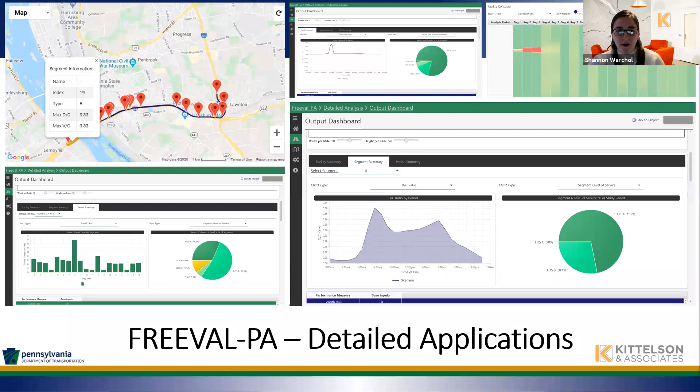In your output section, you can see things such as what percentage of the day or of your segments are at various levels of service. You can see graphical representations of queues, delays, or travel times - many ways to view the output from your analysis, and Bastian will cover that.

I want to take a minute to talk about the policy implications of FREEVAL. As Ed mentioned, this will be rolling out in the first 3 months of 2021 - here we say January 1st, 2021. That may be pushed back slightly, but the implications are the same whenever they do roll out.

For department force maintenance projects, the evaluations will be performed by the district traffic or maintenance staff, and they'll receive approval as needed by the district traffic engineer prior to conducting the field activity. If your district has multiple activities happening that require the same general work zone setup, that analysis can all be done together.

For department construction projects, the evaluation is performed by the design staff, and approval is needed from the district traffic engineer prior to approval of the temporary traffic control plan. For business partner maintenance, construction, or permit projects, the evaluation should be performed by the business partner, and approval is again needed by the district traffic engineer prior to heading into the field for any activity.

The publications this will impact: Pub 23 will require maintenance supervisors and assistant county managers to consider lane and shoulder restrictions during their planning phase for limited access highways. All the pertinent information for proposed work zones will be provided to the district traffic unit for analysis.

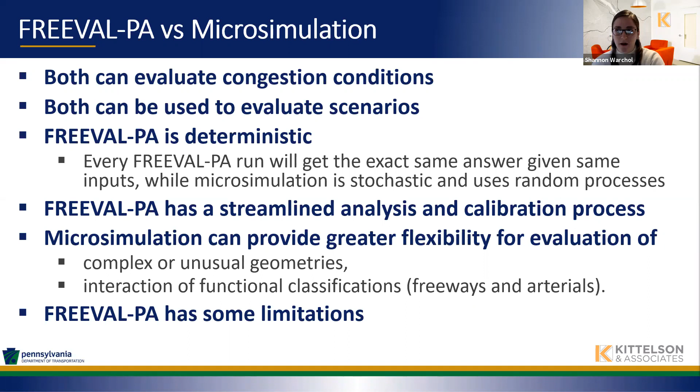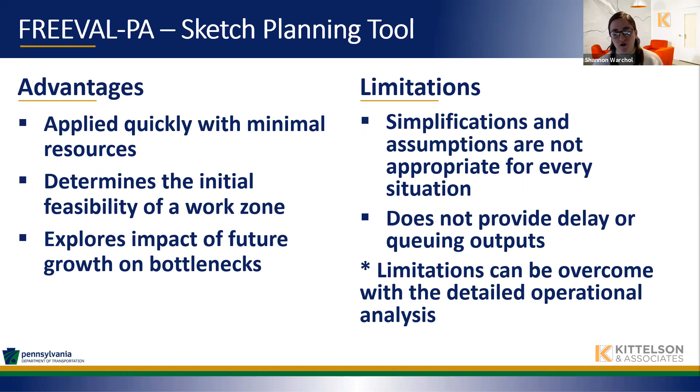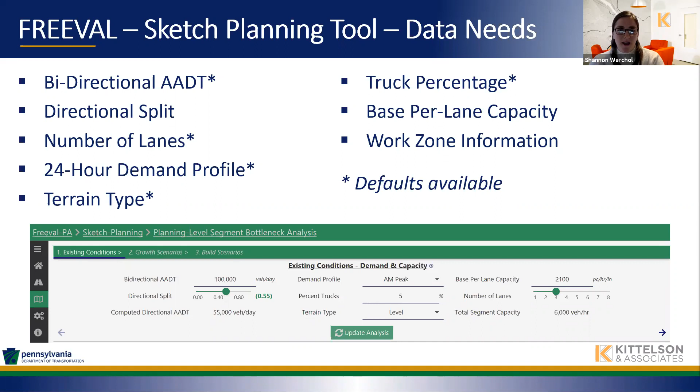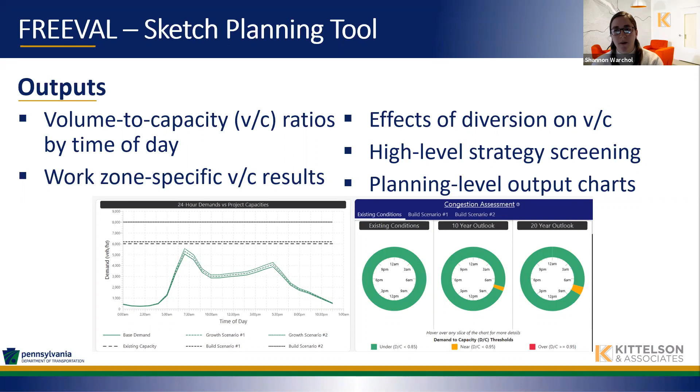Alexandra is going to dig in more on the specifics of inputs and outputs, but here's just a quick overview of the types of inputs. You saw some of those output charts earlier, volume to capacity ratios, work zone specific volume to capacity ratios. Again, it's a high level strategy screening.

On the detailed analysis, the advantages are it balances the detail needed with the output provided, striking a balance between the planning level tools and the microsimulation. It can consider the freeway as a facility with multiple segments, the basic weaving, merging, and diverging segments. It can provide those congestion metrics, and it can be used to explore various mitigation strategies, work zones, future growth.

But the limitation is that it lacks focus on the system effects. It does not look at the arterial interaction, and unusual geometries need calibration.

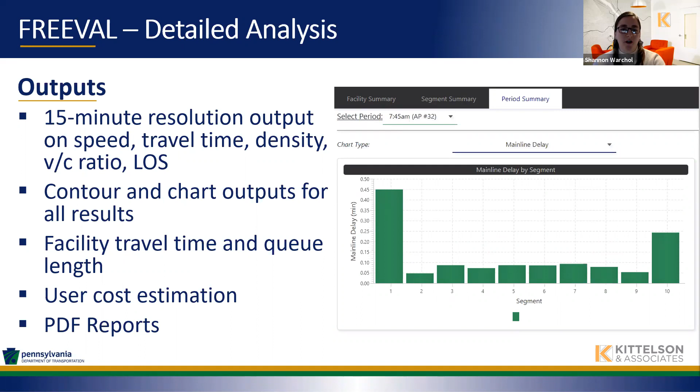Bastian will dive into specific data needs around the detailed analysis, but it's the same inputs as the sketch planning, just at a finer resolution. The outputs are speed, travel time, density, level of service, user cost estimations, and it will create a PDF report for you. So real quick on a limitation here, I'm sitting about a mile away from the Squirrel Hill Tunnel.

Just as an example of maybe what would be more complex in FREEVAL. For those who aren't familiar with the area, we have a stop-controlled on-ramp that leads you to merge into a lane drop. On that exit ramp, you actually have a weaving scenario, and downstream of all this, you have the Squirrel Hill Tunnel, which has congestion issues fairly frequently. A situation like this has a lot of unique features where queuing can occur.

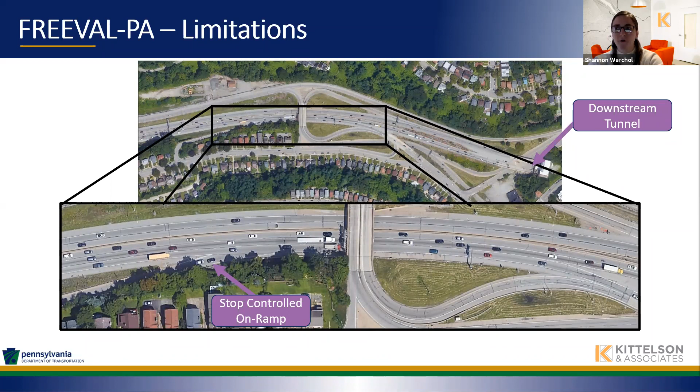You can analyze this situation in FREEVAL. You would need to be very conscious about the calibration, and you would need some field data to help you calibrate that. There are many situations that can be analyzed in FREEVAL-PA, but again, and Bastian will really hammer on this, calibration is very important for these unique geometries.

Of note, FREEVAL is based on the HCM methodology. So if there's something that is not addressed in the HCM methodology, it's difficult to address in FREEVAL. For example, the present HCM methodology does not have a method for evaluating these complex weaving segments with multiple on-ramps and off-ramps, similar to the visual shown here.

You would need to be careful in FREEVAL about how you would break these into subsegments, and again you would need some ability to have some field calibration data. The online modules really dive into this calibration process.

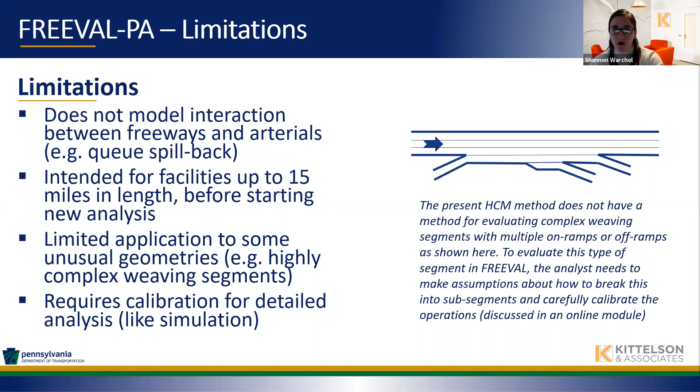FREEVAL can be used for a number of different applications. Right now for Pennsylvania, I think the focus is going to be most heavily on work zones. So focusing on work zones, you can look at the various work zone scenarios, like if you're creating your contracting requirements of what times a business partner can close lanes.

FREEVAL is great for that analysis. Looking at the minimum number of lanes the business partner must maintain is also great in FREEVAL. If you're trying to figure out a diversion target, how many vehicles should we try to divert off the facility, FREEVAL will give you that information, and again, the lane reservation system.

Bastian and Alexandra are going to focus on a number of scenarios, hands-on examples, but I want to give a quick view here of US 222 north of Lancaster. So FREEVAL was not used to inform the scenarios for this project, but it could be. This is an example of where you could potentially use FREEVAL.

So US 222 north of Lancaster, they were looking to complete some work on two bridges here, one at Glenwood Drive and one at Pleasant Valley Road. And so the question becomes, how should you set up your work zone staging? Or how should you stage your work zone?

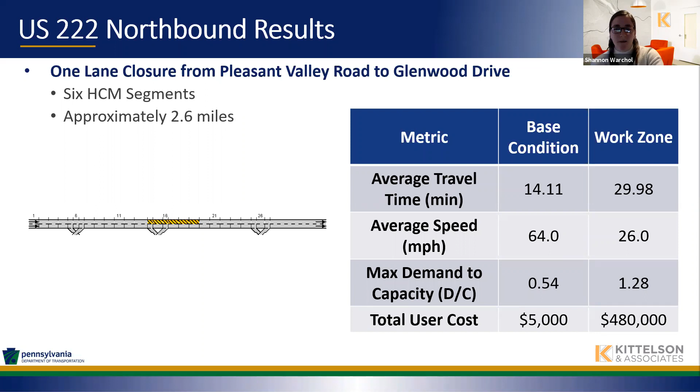In FREEVAL, here is an example where there are 6 segments that have been closed, one lane closure for the northbound route. And we can see some quantitative results here. FREEVAL also provides visual results. So we can see on the left a normal condition.

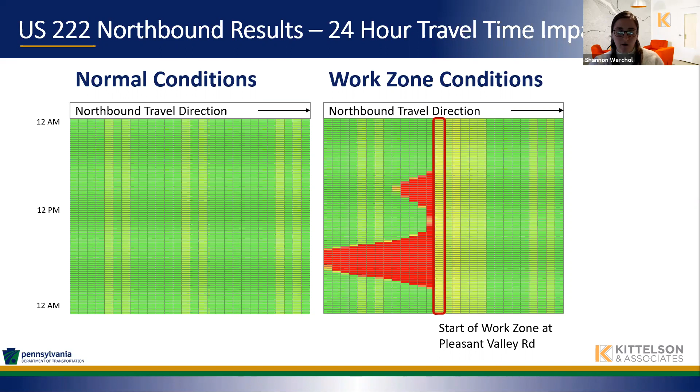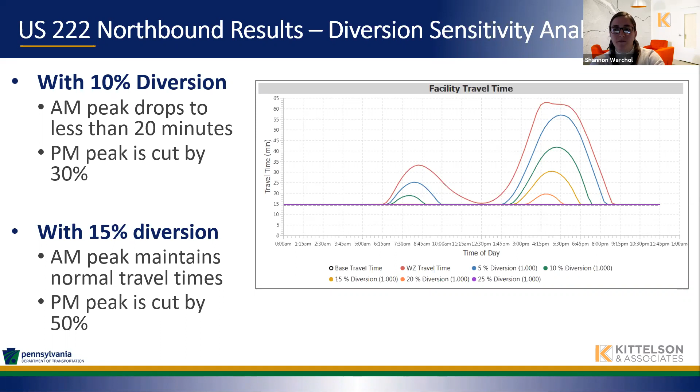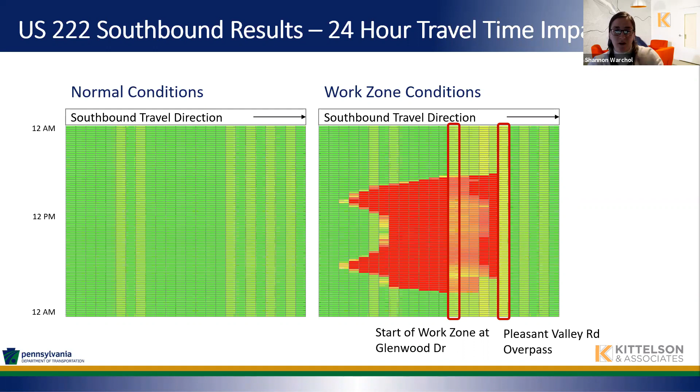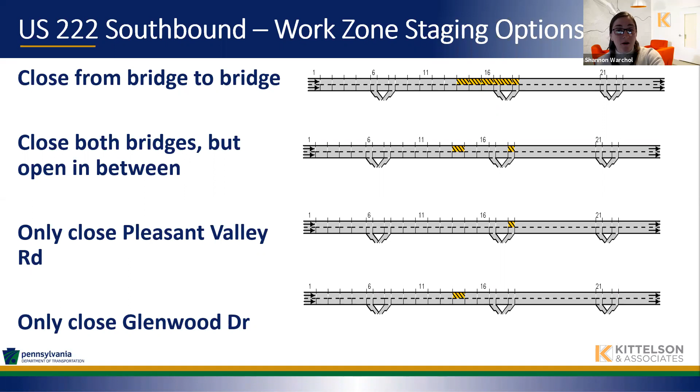In a scenario like this, FREEVAL is a great tool to help you look at what are some alternatives, right? If I close the one lane, the full length of the road from Pleasant Valley all the way to Glenwood, we're going to have some serious issues in the southbound. I'm going to get some calls, some complaints. What could we do instead? Here are 4 different work zone staging options, right? So close from bridge to bridge, like we just showed, close both bridges but open in between, or do your bridge work one at a time. And FREEVAL can show you the various impacts there.

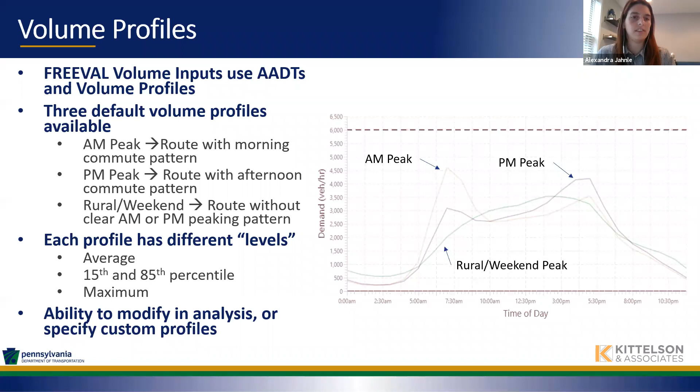Now I'm going to move into discussing some of the planning applications of the tool. And after that, I will dive into some hands-on exercises to demonstrate the tool. The FREEVAL-PA sketch planning method is intended to provide a high-level assessment of volume to capacity ratios by time of day. It does not provide delay or queuing performance measures and is not sensitive to segment geometries. But there are a variety of applications for this planning method, and it's really based on this quick turnaround assessment of volume to capacity patterns.

The method only takes a couple of minutes to complete. It can be used as a pre-screening effort prior to moving into a more detailed FREEVAL analysis, or it can be used as a standalone analysis. It can provide a high-level assessment of work zone impacts, such as including lane or shoulder closures. And the planning method can also allow for conducting some sensitivity analyses. In the context of PennDOT's lane reservation system, the planning method also includes a corridor assessment tool.

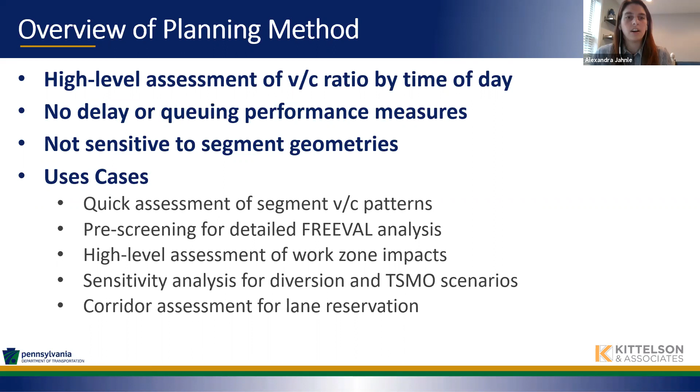To understand the planning method and how the volume to capacity ratio approach is applied, it's important to discuss the definition of capacity. The HCM defines capacity as the maximum sustainable flow rate to pass through a freeway segment. And when capacity is field measured, it's typically expressed in units of vehicles per hour. In the context of the Highway Capacity Manual, capacity is expressed in units of passenger cars per hour.

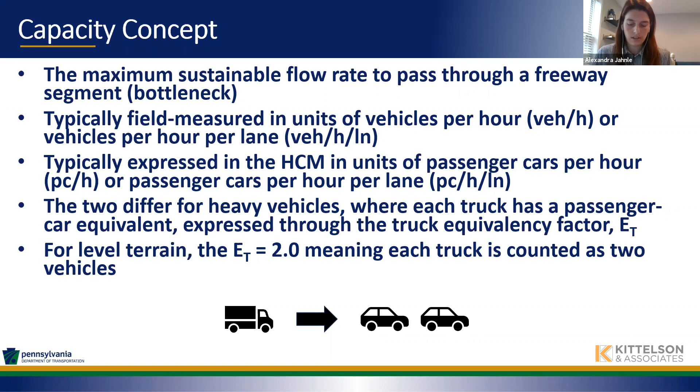These two units differ for heavy vehicles, and when you're looking at the Highway Capacity Manual definition, each truck is counted as a passenger car equivalent, which could vary as a function of grade or terrain type. So for example, the truck equivalency factor for level terrain is 2, which means each truck is counted as 2 vehicles. And for steeper grades, the truck equivalency is higher.

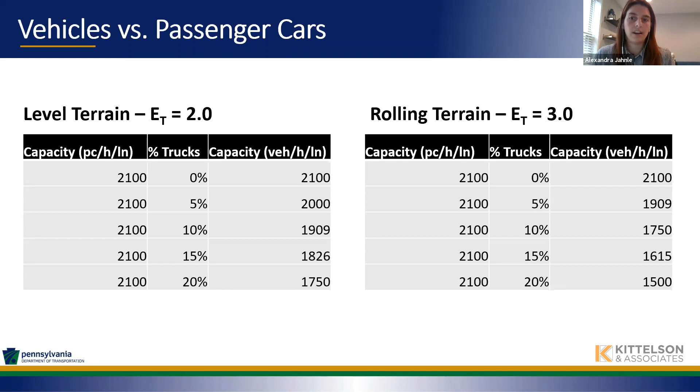All of the calculations in the Highway Capacity Manual and then in FREEVAL-PA are completed in units of passenger cars. So it's important to understand this concept and the conversion if there's any field measured capacities from video or sensor data used to calibrate the tool. There's many more details and tables that document this in the Highway Capacity Manual.

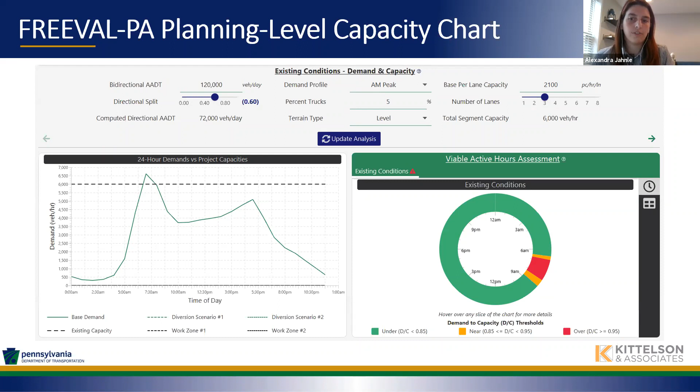On the left, you can see a 24-hour demand versus project capacity ratio. The outputs are provided in a radial and a tabular form on the right, and you can dive into more of the details. These outputs allow for a high-level screening before conducting a more detailed analysis.

So there's going to be 3 exercises to demonstrate how the tool can work. For the first exercise, we're going to look at a project-independent single segment planning analysis. And I'm going to talk through the input data that's shown here, and then answer the following questions as we navigate the interface. So I'm going to now open up the program.

And so as you see on my screen here, there is the FREEVAL-PA desktop shortcut. And then this box pops up when you first click on that program. You can select Open FREEVAL-PA. So for the first exercise, we're looking at a new sketch planning bottleneck analysis.

So when we're looking at the screen, in the center of the tool, you can see there's a create analysis from PennDOT segmentation database. This is how you would access the database that I described earlier. You can also create a new analysis from a blank facility template. This is where you would select and access that part of the tool. You can open an existing analysis as well.

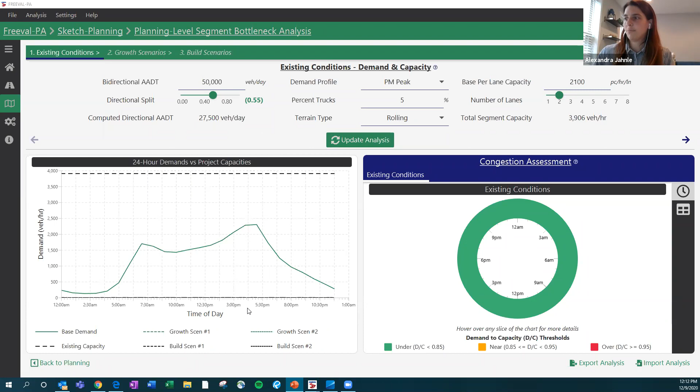So now we're going to look at some questions. So first question is, what is the maximum volume to capacity ratio for the present year scenario? So for the existing conditions, we can see that the maximum volume to capacity ratio is occurring in the PM peak time period. We can further analyze this by looking at the tabular form by clicking on the button to the right. If we scroll down to the PM peak time periods, we can see that around 5 o'clock, there is a 0.59 base capacity.

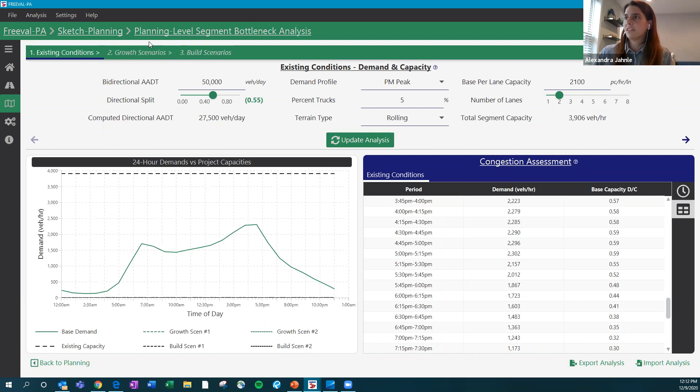And then the next question that we want to look at is, during which times would an 8% growth scenario be near or over capacity? To further look into this, we can access the growth scenario step 2 by clicking up here on the top left of the screen, or we can just select this next arrow on the far right of the window.

To apply a growth scenario, we check this box and we can type the name of the growth scenario. Growth scenario number 1. Then we can apply a growth level. So I'm going to apply a custom growth level of 8%, 1.08, and then you select Update Analysis.

Once you select that, you can see a new demand profile appears on this dotted line, and that's representing the growth scenario number 1. You can also see that another column is applied on this tabular form, and you can see that for that same time period, the volume to capacity ratio has increased. You can also go back and forth between the radial and the tabular form.

And what is the maximum V over C ratio in this scenario? Okay, yep, we looked at that and it's 0.64. Let's just apply one more growth scenario and just to see what the results are with a high 20% growth scenario. If I update the analysis, you can see how that increases.

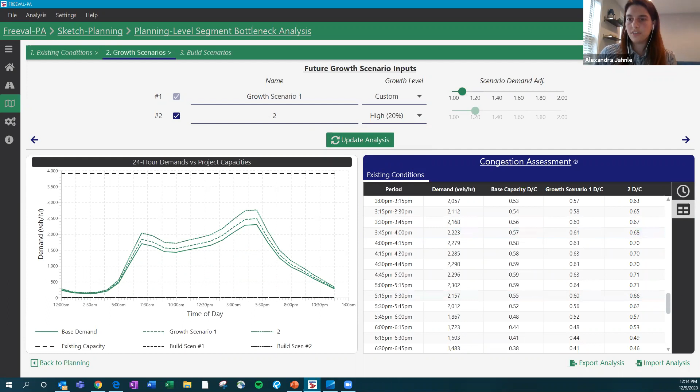So for this, I'm now going to just move into the second exercise. This exercise is going to be a project-based segment level analysis, and we're going to open an existing file to start this exercise. And we'll dive into one segment within the existing facility.

So let me navigate back to the program. I'm going to open up a new file. And so we can navigate to the center of the tool and select Open, and then navigate to a file. Once you select that file, you can see that the facility will populate on the upper left-hand corner of the screen. You can zoom in and out by holding Control and zooming with your mouse.

You can select a facility, a segment of the facility, and see information about the segment. You can also scroll on the bottom of the screen here and select a segment this way. A third way that you can select a segment is by using this drop-down menu and scrolling down to a segment you're interested in analyzing.

For this part of the presentation, we're going to look at the planning level performance of segment 20, and we're going to use the work zone segment staging part of the module. Once you select that, we can enter the information in the exercise. So we'll first enter 50,000 AADT, a directional split of 0.55. The demand profile is in the AM peak period, and the rest of the inputs are default from the file.

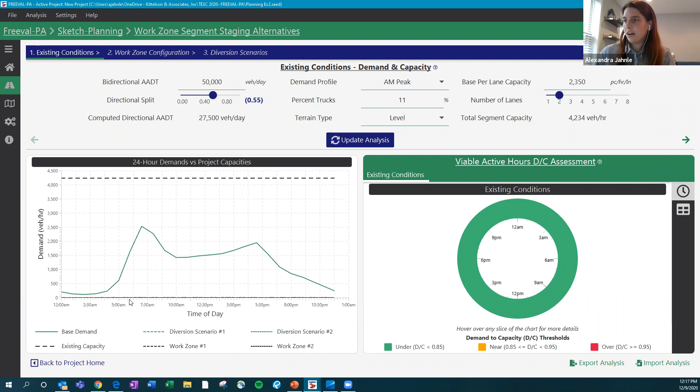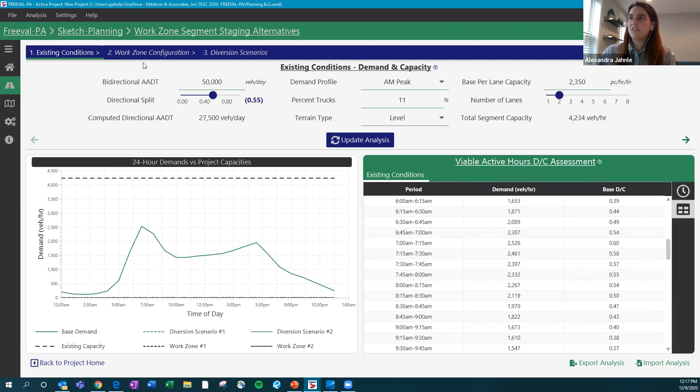And we can see here that the highest demand is occurring during the AM peak periods, about 7 a.m. We can further investigate this by looking at the AM peak period and see that it's close to 0.60. The next question is, what is the estimated max volume to capacity ratio with a shoulder closure? We can move into the work zone configuration step 2 to look into this.

I'm going to apply the first work zone, and it will be a shoulder closure. So you can name that feature and then select a shoulder closure. You can also adjust the work zone capacity using this bar. Then we're going to select update analysis.

So you can see that there's a second dashed line that appears, and this represents how the capacity has changed due to that work zone configuration. You can also see another column that's applied that represents that shoulder closure in the tabular form. The next part that I'm going to show is adding another work zone configuration. This one will be a lane closure.

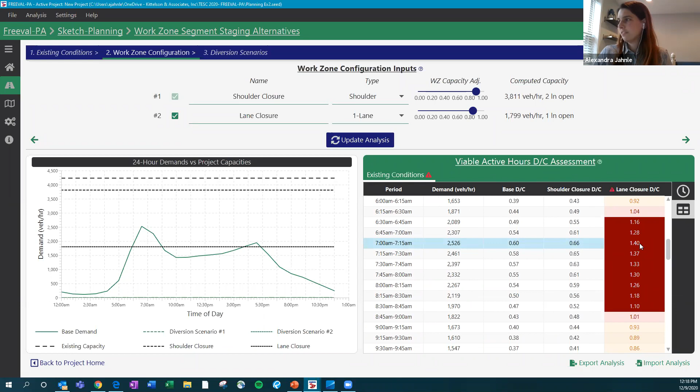So when we apply this lane closure, we're going to update the analysis. And as you can see, the computed capacity for the facility has dropped below the demand curve. We can also see this in a tabular form that now that same time period is at 1.40, which is far over capacity. You can also illustrate this in the radial form, and you can see that in the red areas, it's showing the V over C ratios that are over capacity. The yellow is where they are near capacity, between 0.85 and 0.95.

I'm going to quickly show the diversion tool. If we click that button, we can show that, let's say for diversion scenario 1, we apply a 20% diversion on this segment. We click update analysis. We can see a new profile appear. This is the diversion scenario number 1.

You can also toggle between the existing conditions and the diversion scenario and see that for the lane closure, in the AM or in the PM peak hour, it is not over capacity, it's near capacity. You can also visualize this. If I scroll down to the PM peak hour, you can visualize the difference between the diversion scenario and the existing conditions in a more detailed form.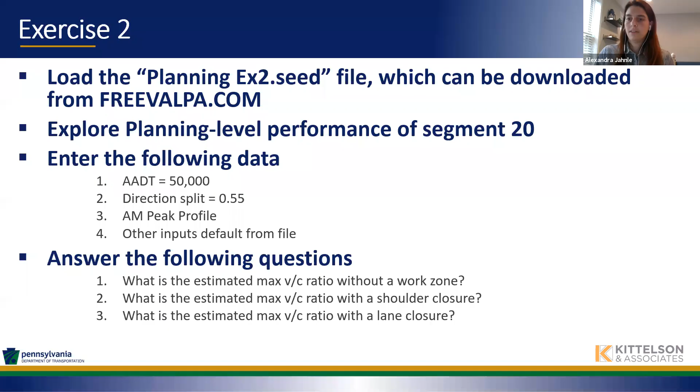With that, I'm going to now move into the second exercise. And for this exercise, we will also explore an existing file and then look at a corridor level planning analysis. And we're going to enter some information about a one-lane closure and then answer a couple of questions about how we can navigate the tool and look at different features of this performance section.

So now let me get back to the program. I'm going to reopen that file. So I'm going to click home and we can proceed and then navigate, and I'll open the file this time through File, Open Project. And I will select that file again. Okay, so for this part of the tool, you can see that we're on the same screen that we just had. In the top left corner, there is the facility. And instead of selecting a specific segment, we're now going to move to the work zone corridor planning module. So we can select go on the screen here.

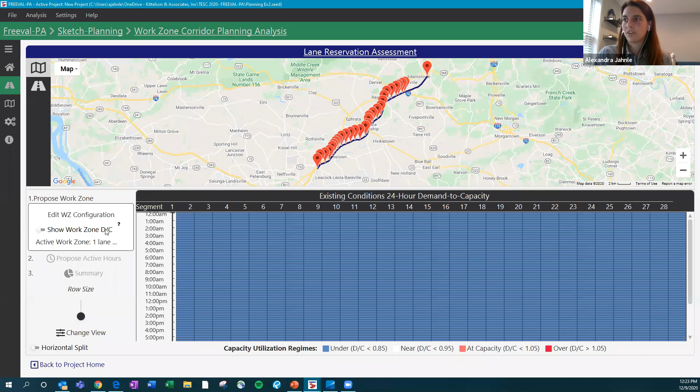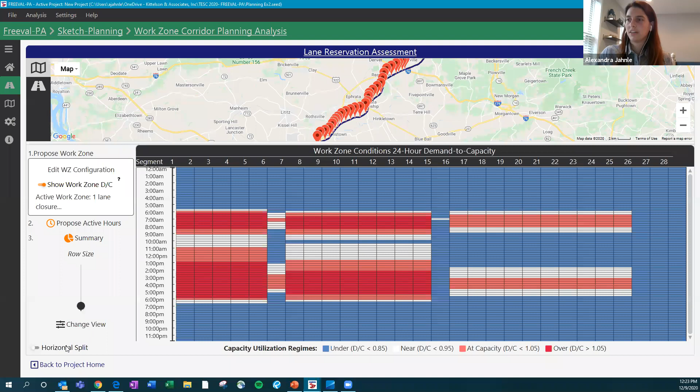Once you click save, you also have to click this button next to show work zone D/C, and you can see the work zone applied. You can also change the view of the screen by clicking horizontal split. For the purpose of this exercise, I think it's easier to visualize. So now that we have this shown, we're going to look at one of these questions. What segments along the facility result in potential capacity constraints for a lane closure?

As you can see here, many of these segments have capacity constraints. The dark red is a volume to capacity ratio over 1.05. The pink color is when it's at capacity, white is near capacity, slightly under 0.95, and blue is under capacity.

The next question is, what is the estimated max volume to capacity ratio for a lane closure in segments 8 through 12? If we want to look at that, we can hover over and see that in the AM peak hour, segments 8 through 12 are around 1.15. In the PM peak hour, they're closer to 1.2 or 1.23. You can see additional information as well.

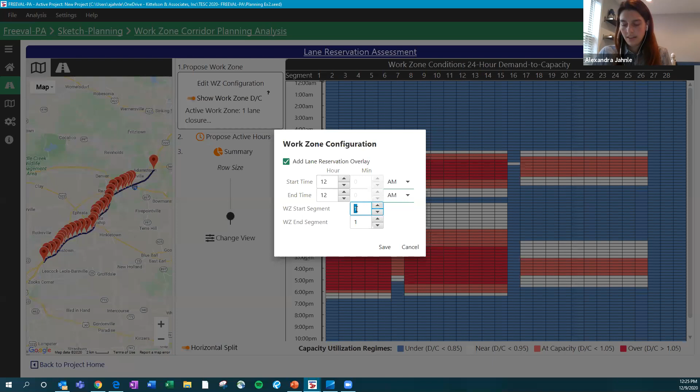Next, what percentage of time periods would be at or over capacity if a 24-hour lane closure was put in place in segments 8 through 12? To see this, we're going to use step 2, propose active hours. If we add a lane reservation overlay, we can maintain the 24-hour time period and then update this to be segments 8 through 12.

Once that's applied, you can click step 3, summary, and you can view a summary of those periods. To answer the question, there are 21% or 100 periods over capacity for those segments in the 24-hour time period. You can also see a summary of this information on the bottom left-hand part of this screen.

The next part of this tool I wanted to share was when we're looking at this next question: what are the allowable lane closure hours in segments 8 through 12 without exceeding capacity?

So there's another part of this tool where you can select change view, and this is the reference start time for where the time periods on the left side of the screen start.

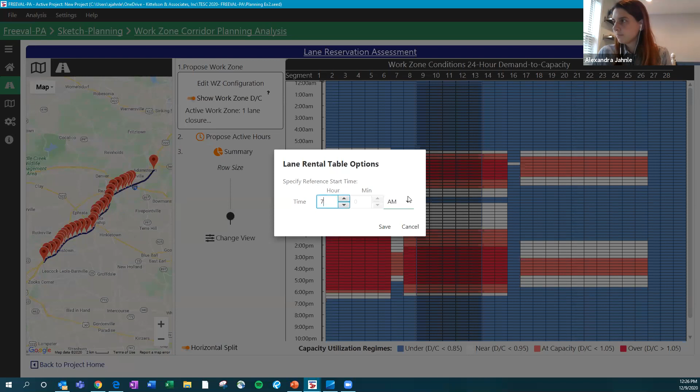If we update that to 7 o'clock p.m., we can see how the time shifted on the left-hand side, and we can visualize that if we close the lane between 7 p.m. and before 6 a.m., that is the time period where we would not exceed capacity with this lane closure, whereas during most of the day, we would have impacts.

So with this, I will now hand it back over to Ed to move on to the next presenter.

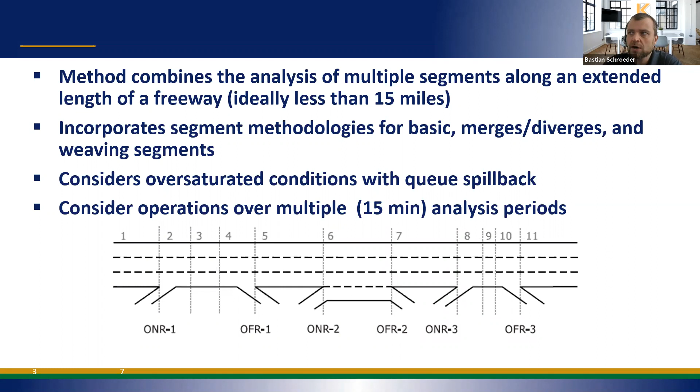Similar to what Alexandra showed, it does allow for oversaturated and undersaturated conditions, including queue spillback. Really all the capabilities in the HCM 6th edition are integrated into this methodology.

So really the key here is alternatives analysis. Looking at an uninterrupted flow facility, a freeway facility, the HCM includes capabilities for managed lanes, active traffic management like part-time shoulder use, ramp metering capabilities, and work zones, which is a big component of what PennDOT is interested in for this.

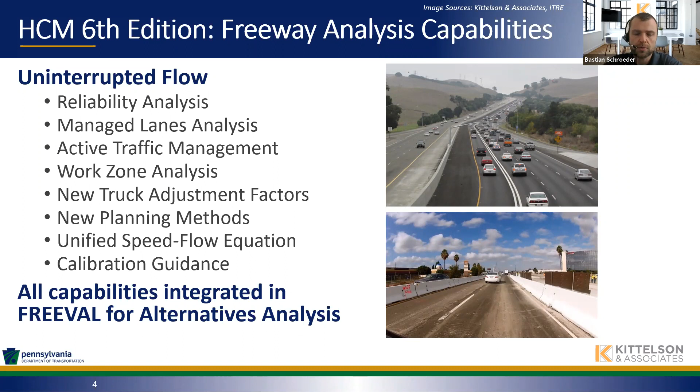But you can also look at standard geometric improvements - the impacts of widening, adding an auxiliary lane, or even comparing what if we widen versus what if we just strengthen the shoulder and do a part-time shoulder use analysis. So all of these you can do within the FREEVAL-PA tool.

So the building blocks of a facility are really these 4 segment types: a basic segment, an on-ramp or merge segment, a diverge or off-ramp segment, and a weaving segment.

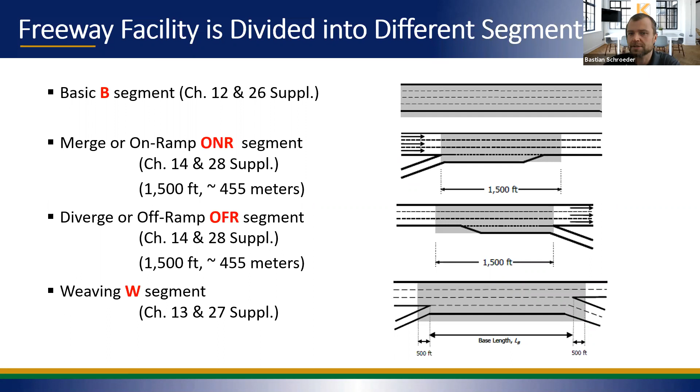The underlying premise of the method is that the queuing in this front segment that we're looking at here, this basic segment, is not because this segment is over capacity, it's because you have a downstream bottleneck with a lower capacity, and there's too much demand relative to that bottleneck capacity. The demand to capacity ratio exceeds 1, and therefore we see queue spillback. That's really the premise underlying this method, is that we identify these active bottlenecks, but we also see the operational impact—the queue spillback into upstream segments.

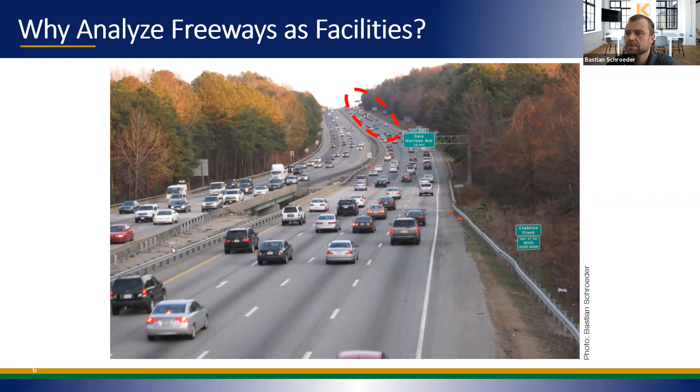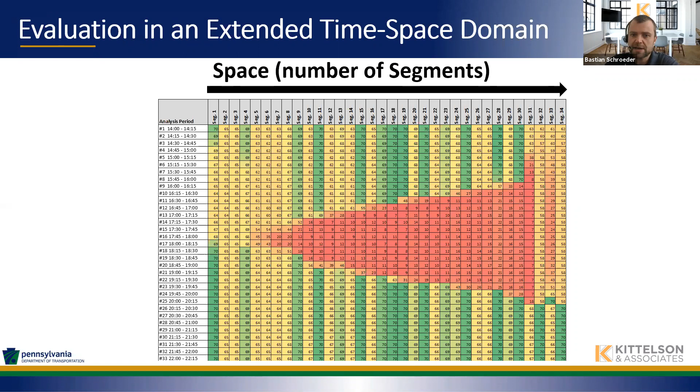And so the output really looks something like this. That's really at the heart of it. So what we call a speed contour—this extended time space domain where you have multiple segments. In this example, there's 34 segments and multiple time periods. We just have a subset shown here, but FREEVAL-PA allows you to go up to a full 24-hour analysis. Similar to what Alexandra showed for the planning method, you can look at midnight to midnight or really flexible time periods.

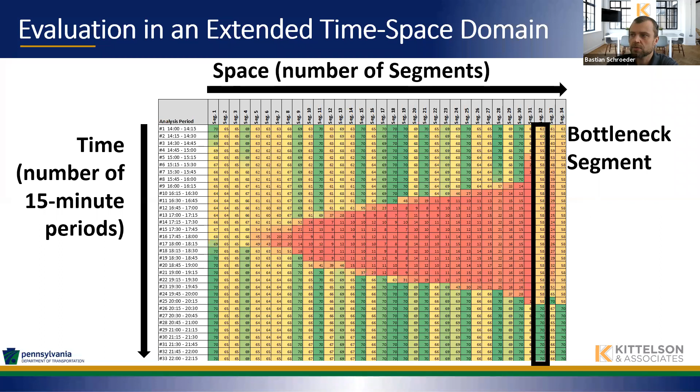And then in the interpretation, if you see a queue like this, really the key is that the bottleneck is what is just downstream of the queue. So segment 32 in this case is the one that I would start my investigation with to really get a sense of what the demand to capacity ratio is, and what improvements I might implement in segment 32 to prevent this queuing. So the key is that the mitigation doesn't happen where you see the queue—the mitigation happens just downstream of the queue.

So the output can then be evaluated to get the maximum queue length. For a work zone, that's a really important performance measure. A lot of times we're trying to minimize the work zone induced queuing, but obviously also just for any other analyses for alternatives, we want to know how long is the queue and how long does the congestion last. So the difference, getting queue duration as well as queue length, are part of the outputs, as well as the travel times throughout the facility.

And then you can also see the numbers within each of these cells is the calculated speed. So if you want more details, you can really get the full set of performance measures—speed, density, travel time—for every time period in every segment.

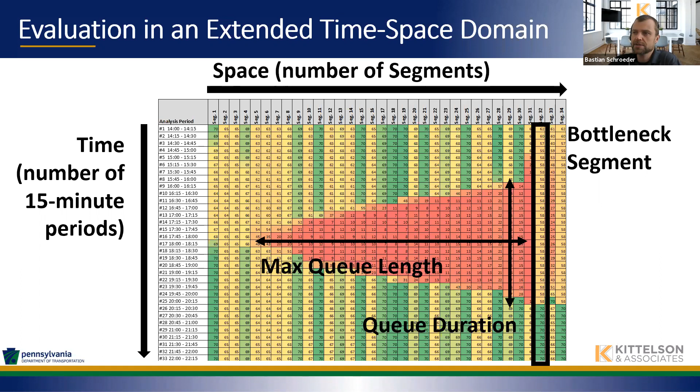So a few key concepts to understand the detailed method is the difference between demand to capacity and volume to capacity. So the D over C ratio, demand over capacity ratio, is really a measure of the full demand that wants to flow through a facility. So whether that comes from an upstream traffic count station, or from your travel demand model outputs, that value can exceed 1. So if demand exceeds capacity, that's useful to know, and also by how much does it exceed it.

So that's a big difference between FREEVAL and a microsimulation tool. In microsimulation, you just see, well, it's congested. FREEVAL will tell you it's a D over C of 1.05, meaning 5% over capacity, versus 1.3, or 30% over capacity. And the reason that's important is that it drives your mitigation strategy. Something that's 5% over capacity, for example, a ramp meter can help with that type of congestion. If it's 30% above capacity, you might look at a more traditional widening, but also a strategy like part-time shoulder use can really enhance capacity by 30%, going from 2 to 3 lanes, for example, where that would be a sufficient treatment.

The volume to capacity ratio is then that which is metered at the capacity of the bottleneck, and so that can never exceed 1.0. And so by comparing those two values, if the two are equal, we know the facility is undersaturated—all the demand can get processed. If the D over C exceeds the V over C, we know the facility is congested—the demand cannot get processed.

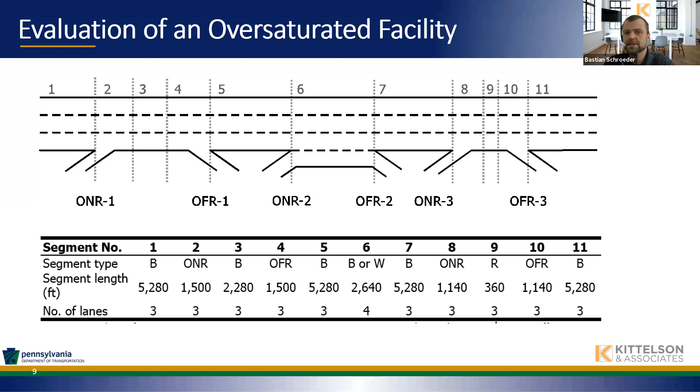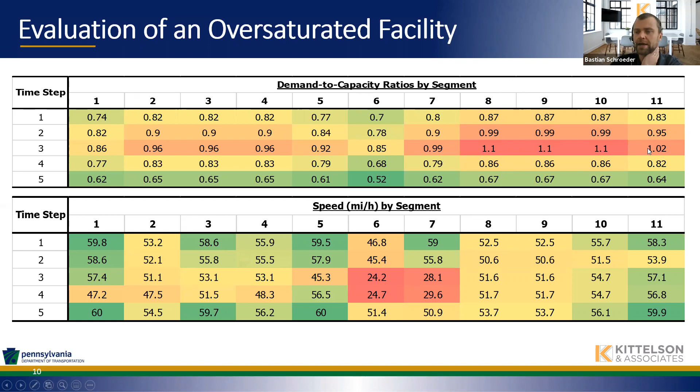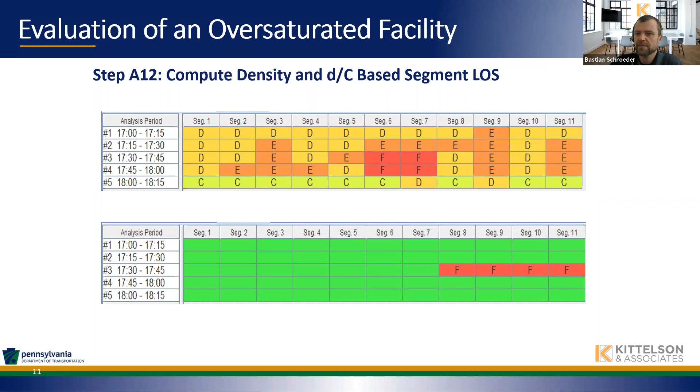And so both of those are considered within the FREEVAL-PA tool, and both of these can get calibrated. For example, a work zone with 12-foot lanes versus one with just 11 or 10-foot lanes, you can further reduce the capacity based on information you have available.

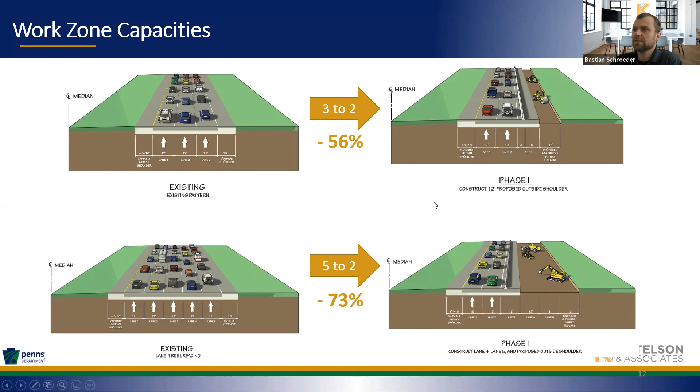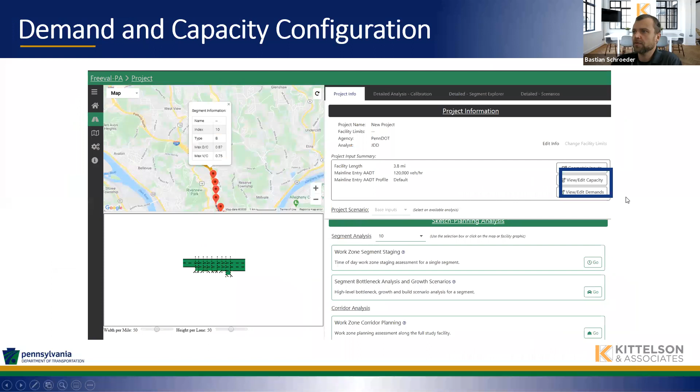So all this can be customized, and I'll show that in the on-screen demo by editing the capacities, editing the inputs, editing the demands for every time period and every segment.

Before going to the on-screen demo, I wanted to, and Shannon mentioned this in the beginning, really talk about calibration. And so that's really a key distinguishing consideration between the planning method and the detailed method. The planning method is intended to be quick. So just demand to capacity ratio, volume to capacity ratio, a high-level sense of the congestion, time, and location.

When we're going to predicting these actual performance measures, really the key is that the facility has to be calibrated based on probe data, for example, and that is achieved through modifying calibration factors, speed adjustment factors, capacity adjustment factors, and demand adjustment factors. And on the training website, on the FREEVAL-PA website, we actually have a series of training modules and examples, and we will be generating additional ones to really talk through the calibration.

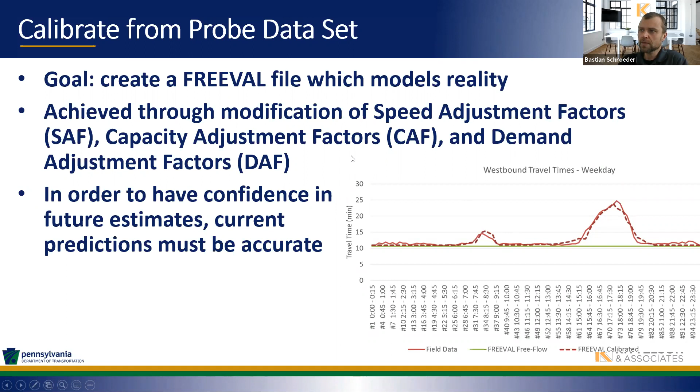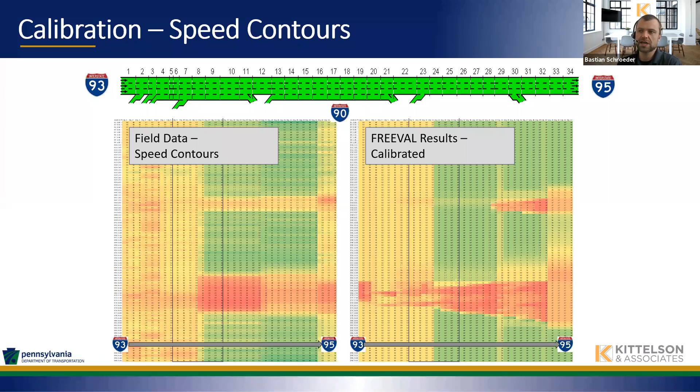And that's because this particular facility, this is actually up in Boston, is part of a tunnel section. So similar to the example that Shannon showed earlier, a tunnel will have very different capacities and free flow speeds. And so even that you can calibrate, but the calibration isn't automatic. You have to do that based on your data input and get that in the facility.

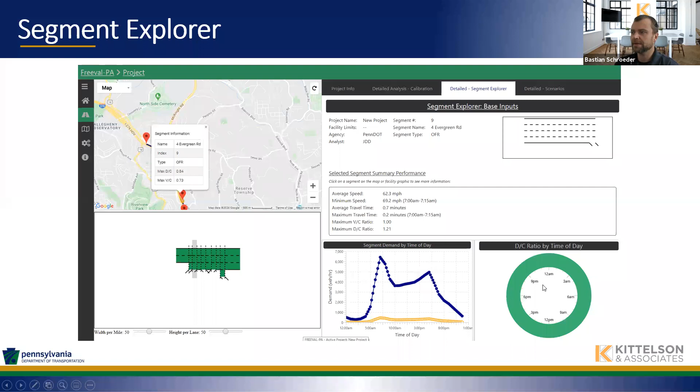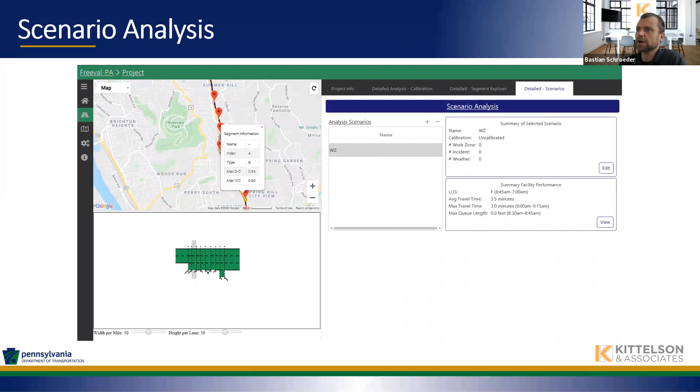Within the detailed method, once set up, you can look at every segment using a feature called the Segment Explorer, where you can get the demand and the demand to capacity ratio and other performance measures for every time period within the segment. You also have the scenario analysis, and I'll show what that looks like, where you can, on the one hand, look at work zones, but you can look at many other factors as well. And then you have the detailed outputs. So you have report generation and different options there.

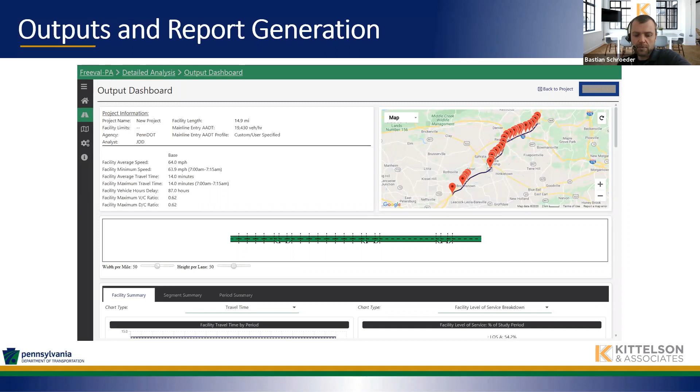So I went through all this relatively quickly because I really want to go to a case study. So I'm going to open FREEVAL here, getting to an existing facility, and then putting in a work zone lane closure, and give you a sense of what the examples look like.

I should mention that this example, as well as the ones that Alexandra went through and some other ones, are all part of the FREEVAL-PA training program that is available on the website. And so if this all moves a little bit quickly, you can also go and sign up for that training for free and go through all the modules at your own pace.

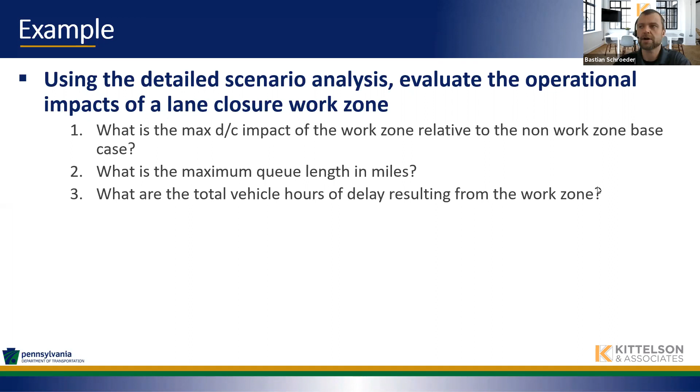So in FREEVAL, instead of looking at the sketch planning analysis that Alexandra had looked at, I will go ahead and open a facility that I previously created. And it's actually that same facility that Shannon had introduced, the stretch of US 222 north of Lancaster. You can see it has a Google Map integration. So I can scroll into the facility. I can highlight segments. I have a map view of the facility. And so you can really interact with any of the segments to understand what the performance looks like.

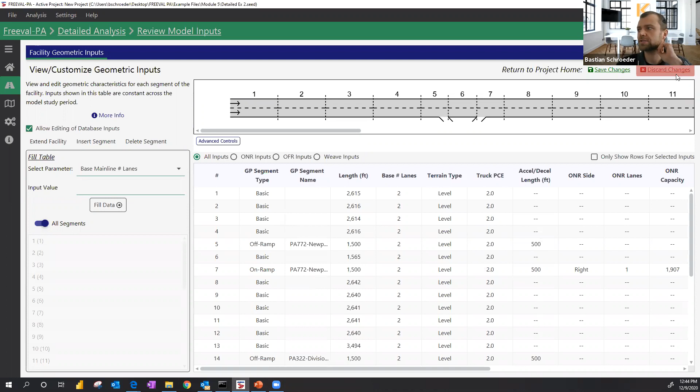You have lots of input features here where you can change your geometric inputs, the terrain types, the truck percentages, acceleration, deceleration lanes. So lots of opportunity here to change things. Lots of opportunities to calibrate capacities, where in this particular case, for example, there is a set of PennDOT default capacities that is also described more in the training that I can apply here. And what that will do is reduce the capacity for some of the merge, diverge, and weaving segments to be a little bit more conservative.

You can also edit your demand profiles, and this is a true demand profile for this facility. So this is not one of the 3 defaults that Alexandra talked about, but this is one that we actually obtained from the PennDOT Tire website from one of the sensors, picked representative days, and then put that directly into the tool here. And there's copy and paste functionality to get the demands in here.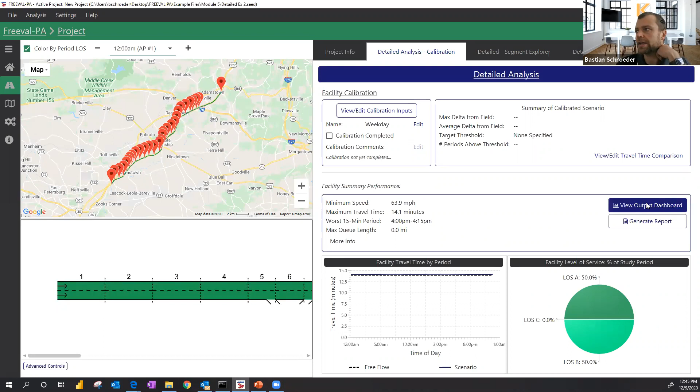You have the detailed calibration capabilities, which I'll skip in the interest of time. But again, this is described in more detail on the website. And you can take a look at output dashboards. So this is a look of the facility without a work zone in place, where you again have a facility preview. You have information on the travel time by time period. Not very exciting here because you see everything is level of service A and B.

But if I jump down to, for example, show the demand to capacity ratios, you can get a sense that for this facility, the highest V over C is around 0.7. So it's about 30% below capacity. And as such, we don't really see any congestion. So when we look at the travel times, when we look at the facility speeds, we don't see much of an impact without the work zone.

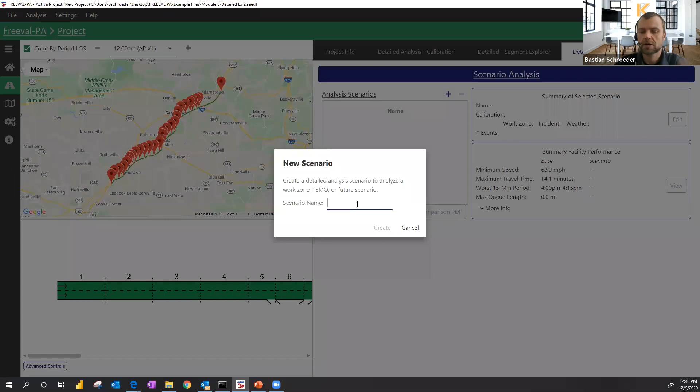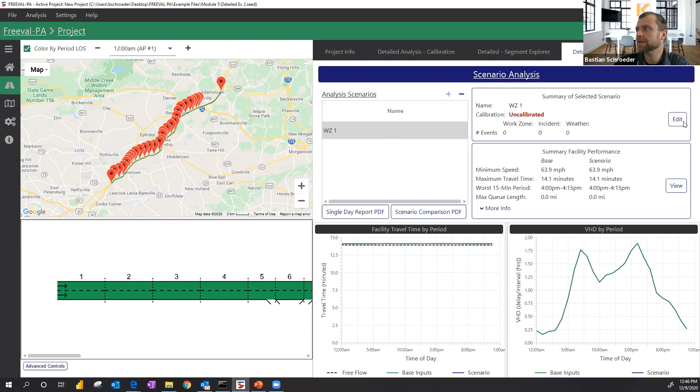But if I want to go through and go to a work zone, I can define one here. I might call this work zone 1. There's a limit of 1 scenario for each instance of FREEVAL, but you can always save as and do another one. And so I can go into the scenarios, and you can see you can do work zones, you can do incidents, you can do weather.

But if I go ahead and add a work zone to the facility, and I'll just do a 24-hour lane closure, so from midnight to midnight. And I'm going to do that at the end of the facility, segments 20 to 23, similar to some of the bridge locations that Shannon had mentioned.

The work zone type is a lane closure with concrete barrier, and I'm going to just call it a rural location because it's not within Lancaster, it's a little bit outside of it. And you have other settings that you can change, like the lateral distance and the work zone speed limit. So relatively quick to configure, and if I hit save, I can now go ahead and view the outputs.

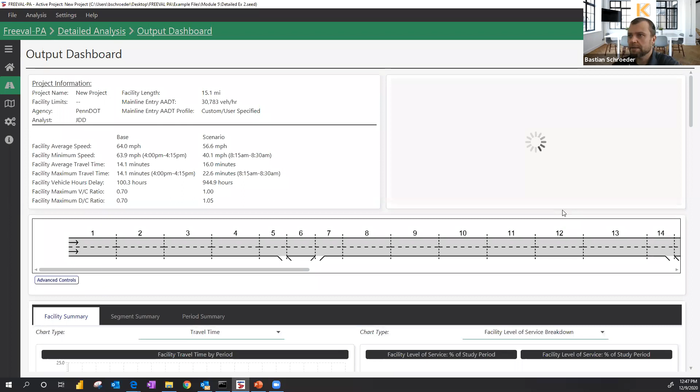And really just within a matter of minutes, I now have my base facility, which in this case was already set up and calibrated, but I was now able to run a work zone scenario where, in the scenario dashboard, we see a comparison within the same chart of what the free flow travel time and the scenario travel time is. I also see the impact on the level of service.

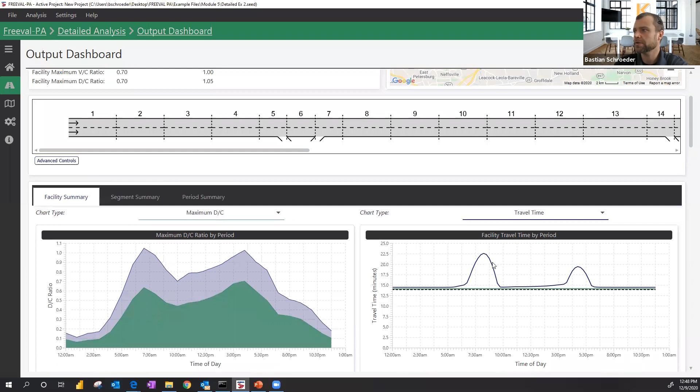If I look at that same demand to capacity ratio, I see now that the work zone exceeds capacity for just a few time periods in the AM peak and a few time periods in the PM peak. And you can mix and match these performance measures to see them side by side and really explore and interact with these different charts.

You can look at queue percentages. In this particular case, there isn't much queuing evident on the facility, but anytime you hover over it, you see what the resulting percent queue length is, or what the resulting queue length in miles is, for example. So the queue length in this case is about 0.9, so just less than a mile is the maximum queue length.

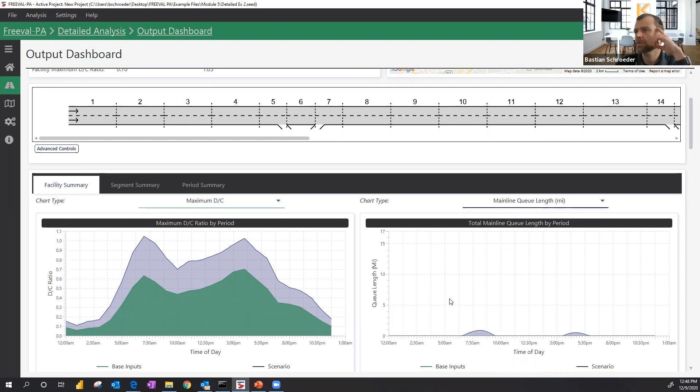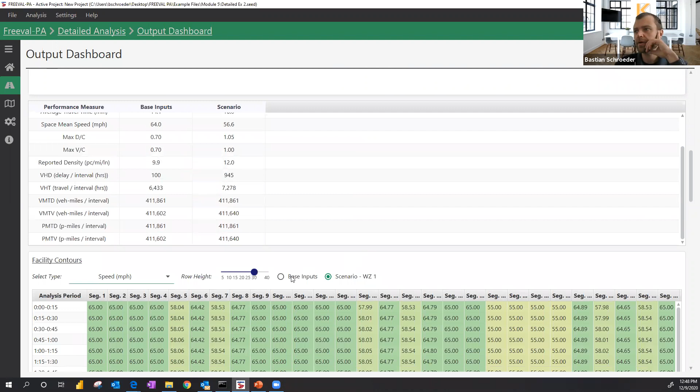If I scroll down, you see that there's a lot of other performance measures that you can get, information on the user cost, the average travel time, the maximum demand to capacity ratio, but then also really detailed speed contours, where, for example, for the base facility, each cell is the speed in that segment at that time period. There isn't too much happening here.

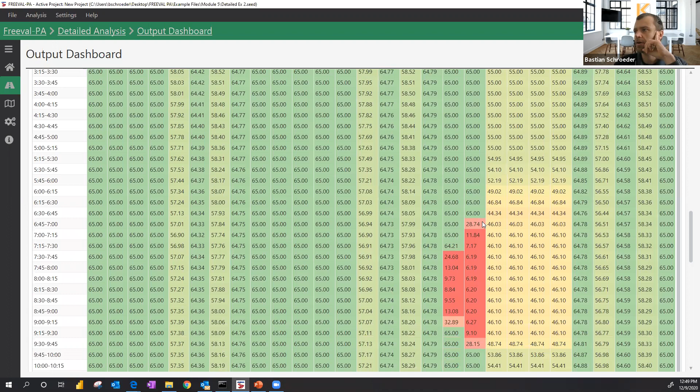But if I go to the work zone scenario, you can now begin to see where the work zone results in a bottleneck in the AM peak period. So the queue starts at around 6:45 in the morning and lasts for about 3 hours. It's not a very long queue, but it's a long-lasting queue. And then there's another occurrence of a little bit shorter queue in the PM peak period.

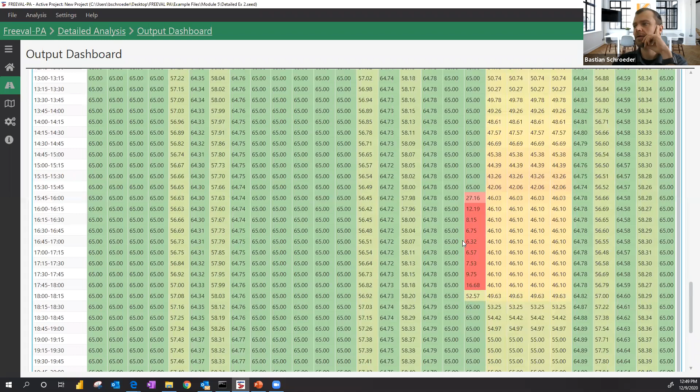A lot of these graphs are scalable, where you can, for example, zoom out, if you don't want to see the numbers and you just want to see the visuals comparing the base inputs to the work zone. And you can also change all of these to get different performance measures. So for example, if you want to see the density on the facility, you can get those plots.

So it's very interactive, and everything in here, you can copy and paste the information out. You can export it into Excel, or you can generate the PDF report to get a standard formatted PDF document, so that every one of your analyses looks more or less the same.

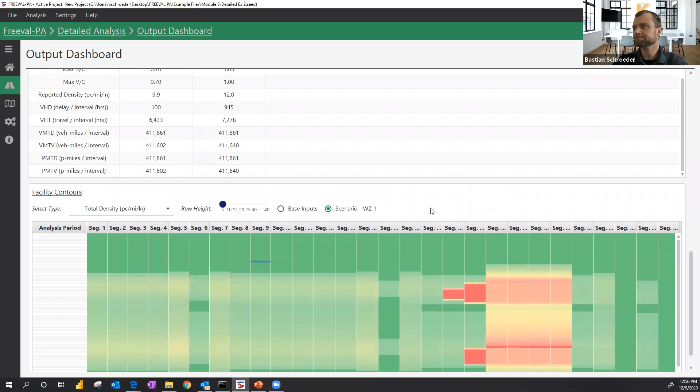So this was a very quick overview. Again, there is a lot more information available on the website that we encourage you to really check out. In the interest of time, I think I will stop my presentation here, which will allow about 10 minutes to answer some of your questions. Thank you.

Okay, and we do have some questions coming in, Bastian, so I'll start at the beginning. I don't know if you're able to look at the questions, but Becky Bureau has a question. In the sketch planning tool, how do you decide what value to use for the work zone capacity adjustment factor? And is there a standard or default value for shoulder closure and/or lane closure?